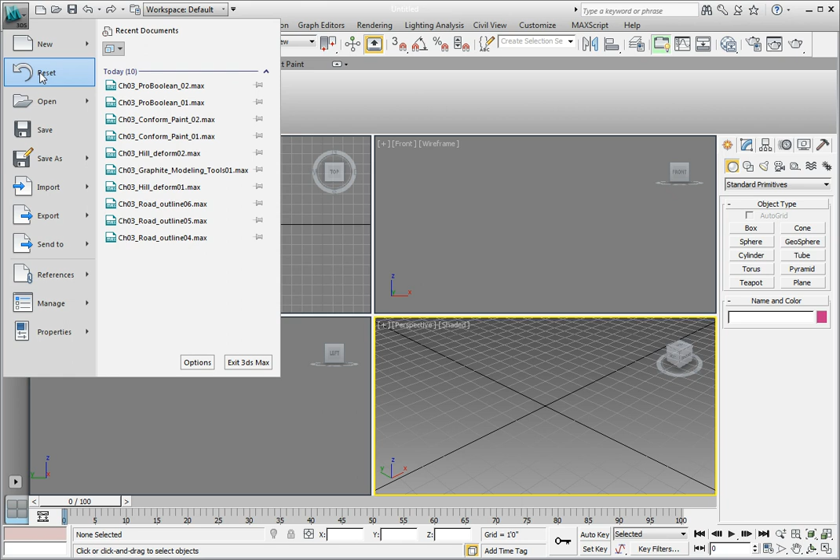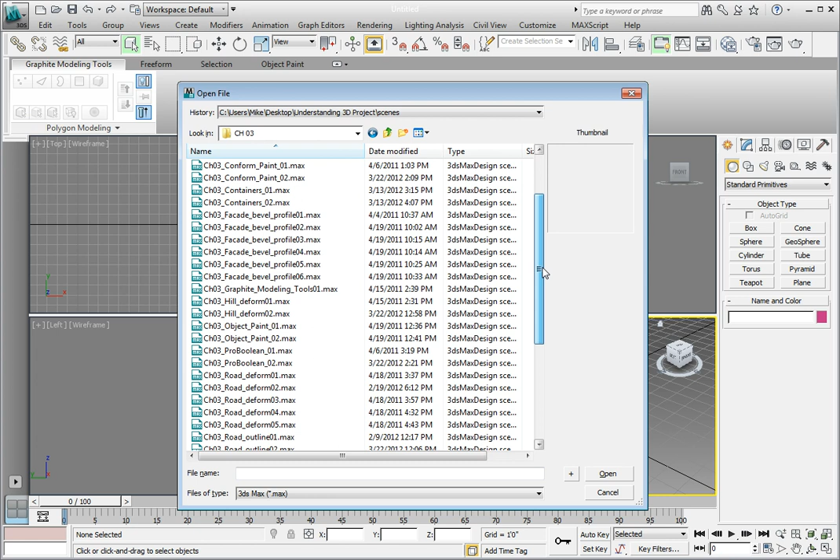We're going to open a new scene from the Chapter 3 Datasets directory called Road Deform 01. Click the application button, Open, navigate to the Chapter 3 directory. You'll see Chapter 3, Road Deform 01.max. Click to select the file, then click Open to open the file in 3ds Max.

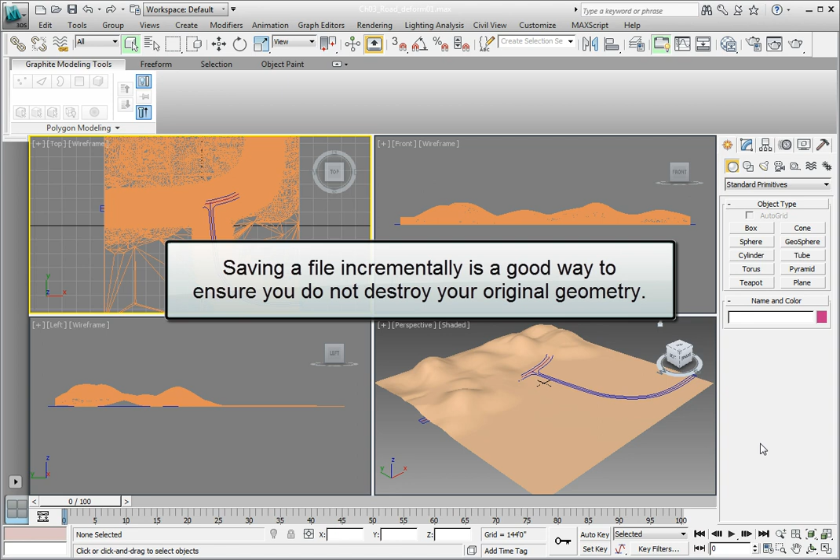What you see is a hilly landscape. It also contains the 2D geometry that will be used for the roads. The first thing we'll do is save the file with an incremental file name, so if we ever need to, we can get back to this original file. Click the Application button. From the drop-down menu, click Save As. You should be getting good at this by now.

Click the plus button to save as an incremental file name. It asks you if you want to overwrite a file. Go ahead and click Yes to overwrite it. Again, this all depends on whether you're saving to the same location that you're loading your files from. In this case, the Scenes directory, Chapter 3 Datasets directory.

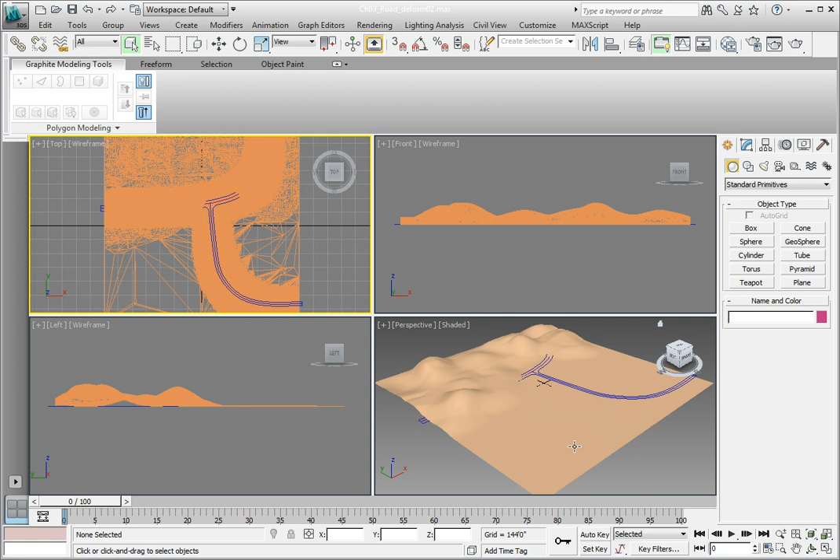Here we have the landscape with the 2D shapes. Select the landscape. We're going to use the Compound Objects, which is in the Creation Tools menu. Navigate to the Command panel. Click the Create tab if you're not already there. In the Geometry drop-down list, select Compound Objects option. This particular compound object that we're going to use is called Shape Merge. Click the Shape Merge button.

Remember, we have the landscape selected. This is very important. In the Parameters Rollout Operands list, it should say Mesh equals Landscape 01. So make sure that before you click the Shape Merge option, your 3D object that you'll be projecting onto is selected. Next, we pick the Pick Shape button.

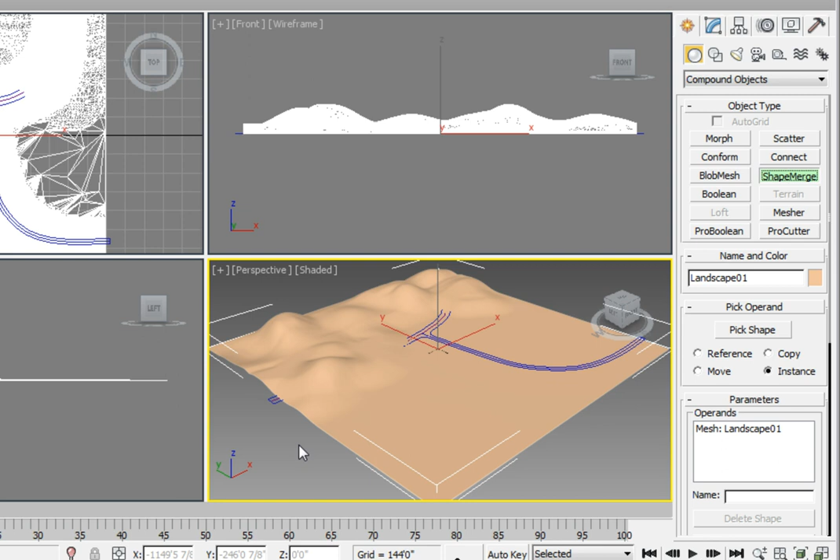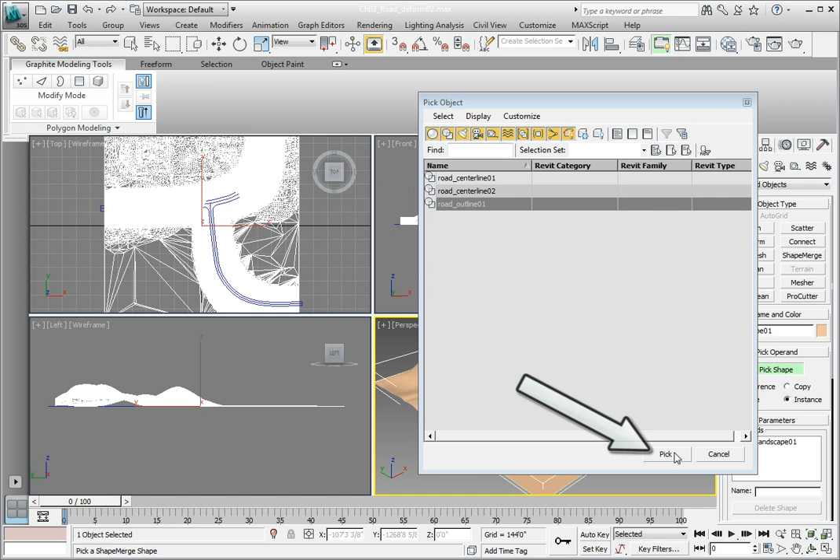If we look, there's no place right now that I can easily get access to click on the shape to select it. Press the H key to bring up the Pick Object dialog. We want to select the road outline shape and then click the Pick button in the lower right corner. It'll take a second. You won't see very much happen, but the 2D shape has now been merged into the 3D surface. Right-click on the geometry in the perspective viewport and select the Convert to Editable Mesh option. This way we can select the polygons that we've just defined.

Switch over to the Modify panel if it's not already there. Expand the stack view. Change to the Polygon sub-object level by clicking on the Polygon option. We'll see that the newly defined polygons where the shape was merged into the surface turn red.

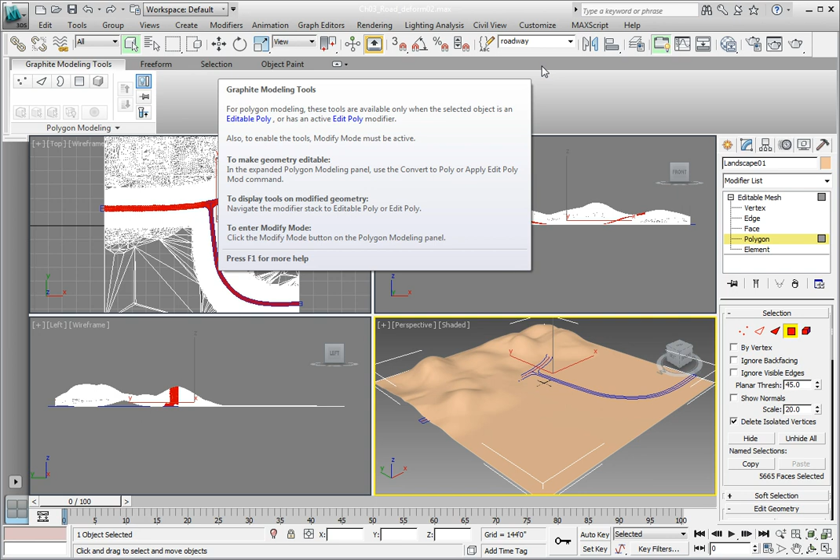Up in the main toolbar is the Create Selection Set Type-In field. Click in this field and type in roadway. Then make sure you press the Enter key. Pressing the Enter key will set that name as the selection set for those polygons. This allows us to easily reselect the polygons for later editing if we go off and start working on a different aspect of the scene.

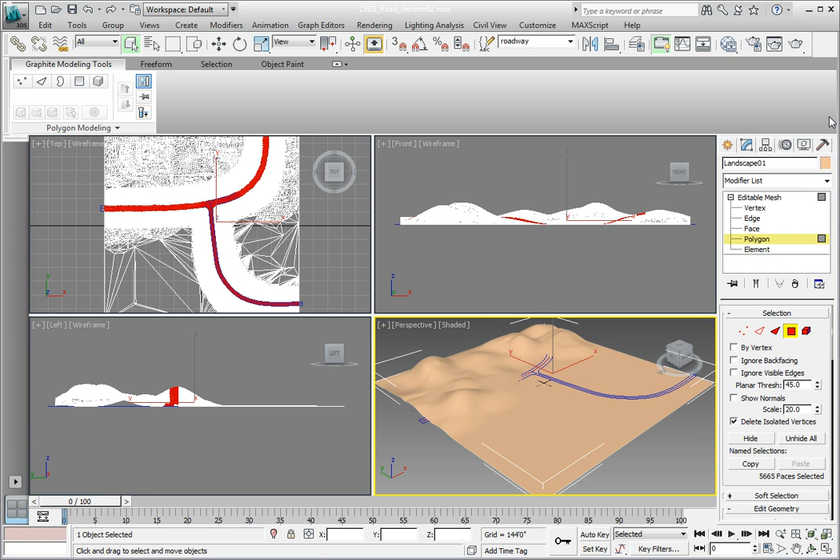Lastly, don't forget to exit the sub-object level, again by clicking on the top level of the editable mesh in the modifier stack. Make sure the icon for the polygon sub-object level disappears. Press Ctrl S to save the file. We have now merged the 2D shape into the 3D geometry and created a new selection set of polygons.